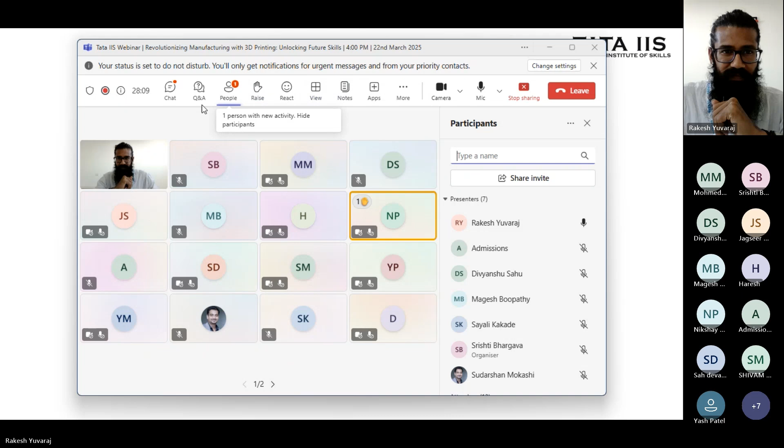Rakshesh Singh says yes. That is a very good answer. Thank you so much for replying to me.

Now we will see the slide. The answer is yes - technology webinar using 3D printing and additive manufacturing. Everything is possible by using 3D printing - everything in your day-to-day life, seeing things, feeling things. Many things are possible. So now I'm going to show you some slides of industrial applications and which sites are using it.

End of this slide. Again I will ask you the same question - is it possible or not? You give me your answer.

Before going into 3D printing, I want to clear something up: what is 3D printing and why 3D printing? In 3D printing, you can save nearly 90 percent of the material. We have traditional manufacturing, which is a very old technology. In that technology, you need to cut all your material and then scoop it out, like scooping ice cream. So you remove material and then you work with it - not exactly waste, but the material goes to scrap. You can reuse it, but 90 percent of the material needs to be removed.

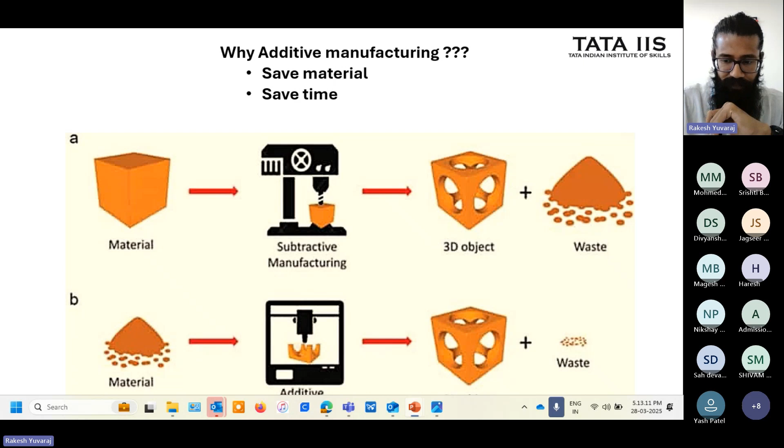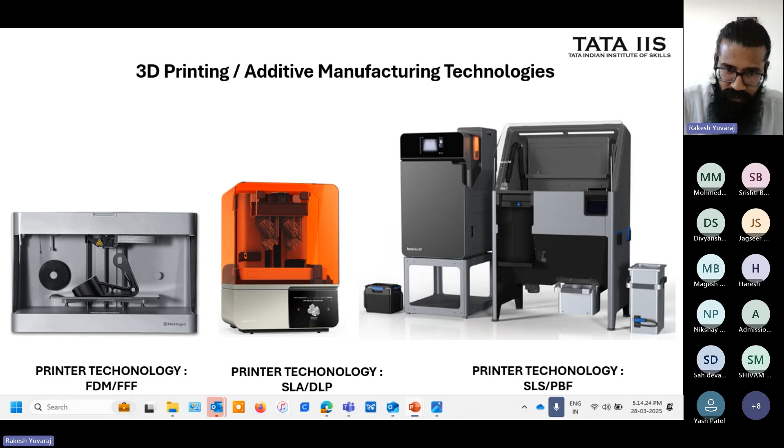The second printer, the orange colored one, is used mostly in the jewelry and dental industry. This is the third printer - we call it SLS, selective laser sintering. This third printer is a very industrial printer, and you can create any product for direct end use. These are the three common technologies used throughout the entire world - very, very popular. Same technology everywhere.

First, the FDM printer - it is solid based, meaning we use a material like a wire, which melts and then prints. The orange color printer, the second one, works with a liquid system - liquid meaning resin, which is the material used to print. The third technology, this big machine, uses a powder-based system. So these are all three technologies using three different materials: solid, liquid, and powder.

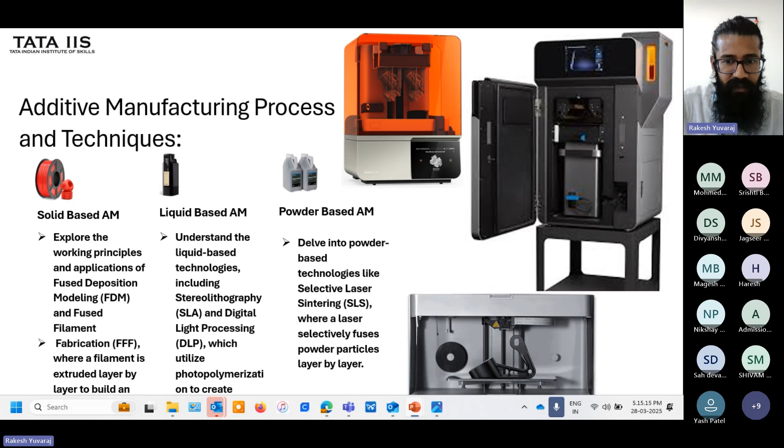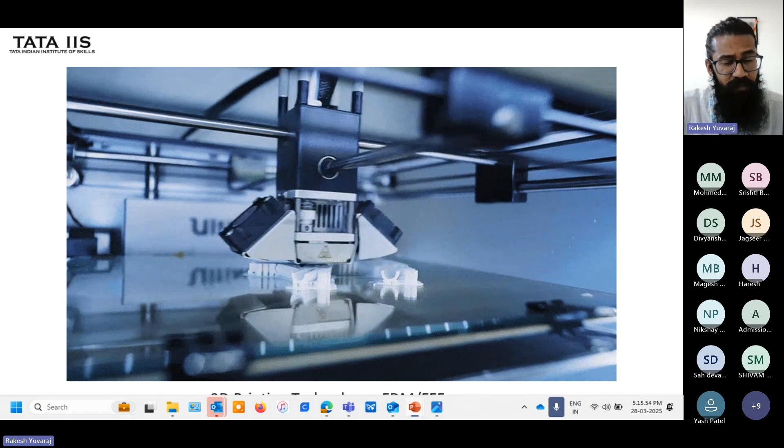This is your first technology of 3D printing. We call it FDM. This is the most affordable price, and for all the prototype work, we can use it. So this is the machine printing a part. This is how this machine works, very fast and also very user friendly. Many people see this thing in your school, college, or friend's office, or in movie. This is a more popular machine.

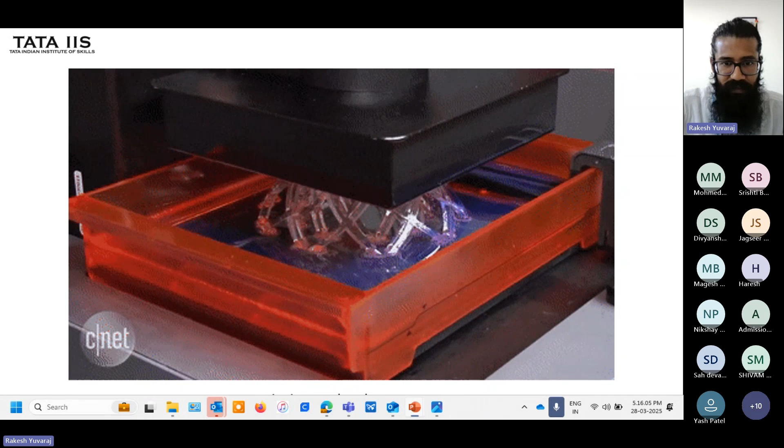And second printer, we call it SLA. This printer is used mostly in jewelry and dental. So at the bottom you're seeing here, the light and then the blue color liquid. This is a resin.

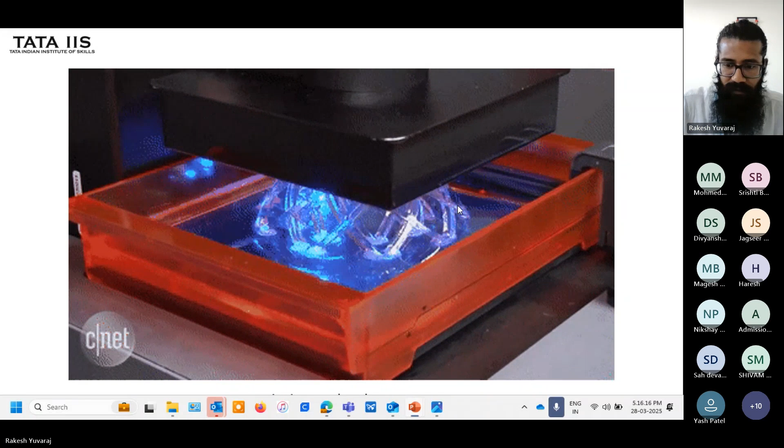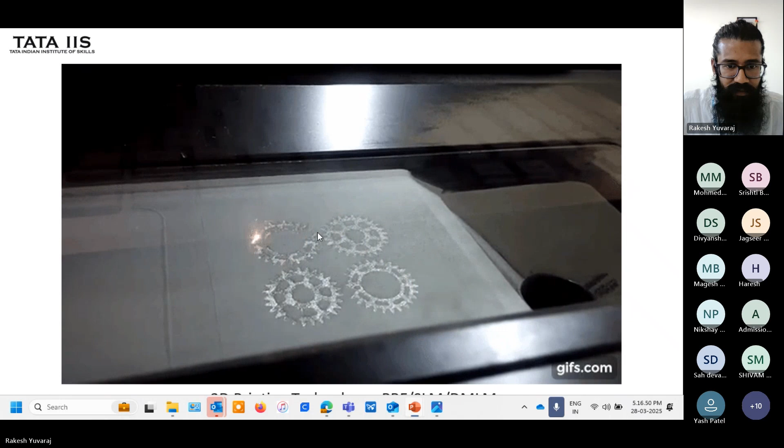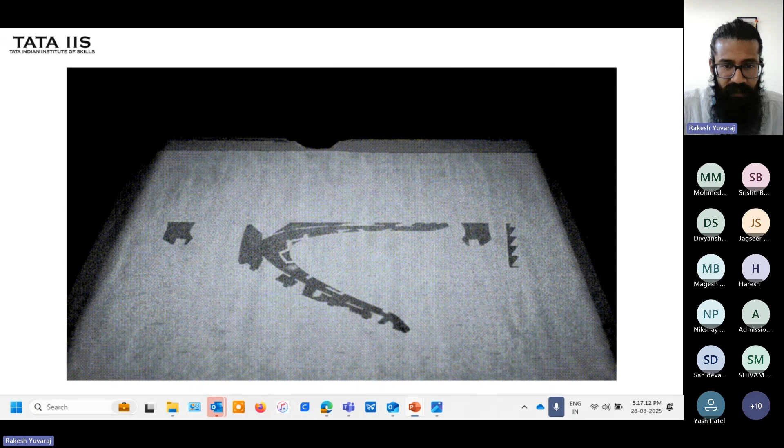This is your fourth technology. This is also most popular in industry. We use polymer powder here. Polymer powder is like a plastic thing, but not exactly plastic. In 3D printing, mostly 90% we will use only biodegradable powders and also very environment friendly powder. We will avoid 90% plastic in the 3D printing industry to save nature and the environment.

Now, first we will see what industries are very famous. We have nearly 7 to 8 industries very popular for using 3D printing.

First industry is biomedical. So here you are seeing a skull implant. It is very rare to manufacture and very complicated to manufacture. By using welding or other traditional manufacturing, it is not possible. If you keep it inside your head, it will start infection and sepsis. So we have to use a proper material. It needs to be a material your body will accept. We call it biocompatible material, that is titanium. We are using titanium material here, the world's strongest material also.

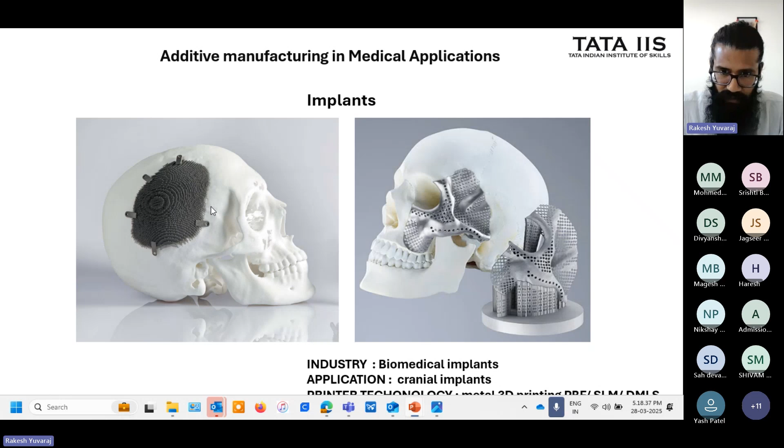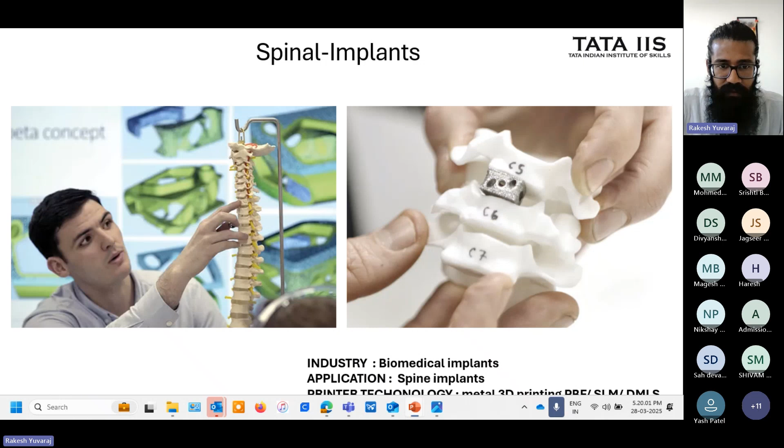Third industry in biomedical is spine implants. This implant is very critical because it goes and touches the patient's spinal cord. Once we damage the nerve system in the spine, the patient will be paralyzed, they can't move below the waist, they can't shake their legs or anything. It will permanently become numb. So 3D printing is the only technology that can give you the complex and complicated biomedical implant.

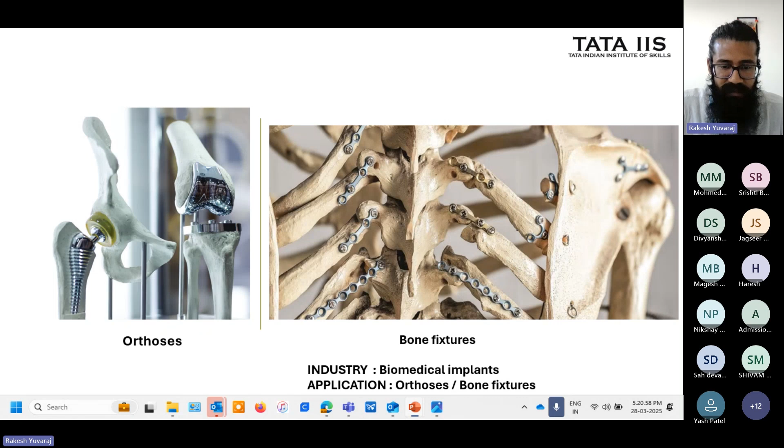Fourth biomedical implant is your joint, orthosis. You know that after getting old, 50 or 70 years old, or athletics, cricket players, their knee joint or hip joint will get damaged. So in 3D printing we have a solution. We can print that exact patient model file and print it for different patients having different body structure and bone structure. In 3D printing, you can get 99.9 percent exactly the same design and print it. This is the benefit of 3D printing in biomedical implants.

This is also 3D printing, a very future thing. For example, tissue bioprinting. There are lots of fire accident people, acid victims, who once they got in that accident, permanently their tissue gets damaged and they can't recover. But by using 3D printing, we can take DNA from the patient and a blood sample from the patient, and in the lab we will cultivate the tissue, cell cultivating for 21 days, and then print the machine with the exact tissue material.

So this is also based on a liquid system 3D printer. This technology already exists in the United Kingdom. In a university, they have the machine, so they can research. In future, up to 10 to 12 years, we can print kidney, we can print internal parts, we can print many things for a human body. Right now research and development is going on, but this is the future.

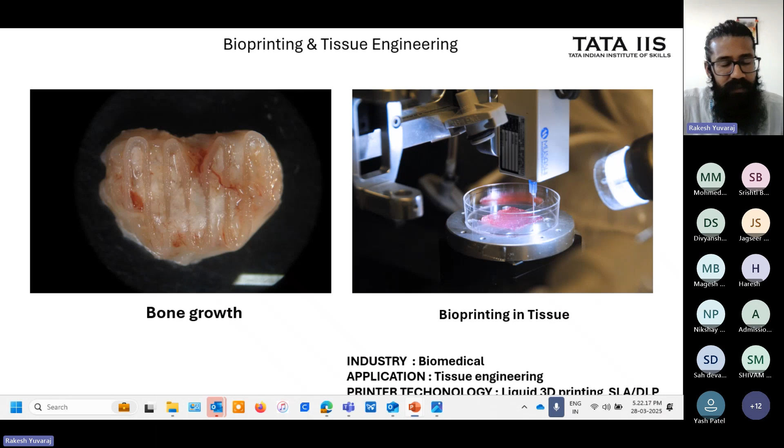This is the process for people who have lost their hand, fingers, or legs — they are able to use prosthetics made by 3D printing. In normal manufacturing processes, the weight is heavier, so patients can't lift the object properly because the piece itself is heavy. But in 3D printing, you can print it with less weight and high strength.

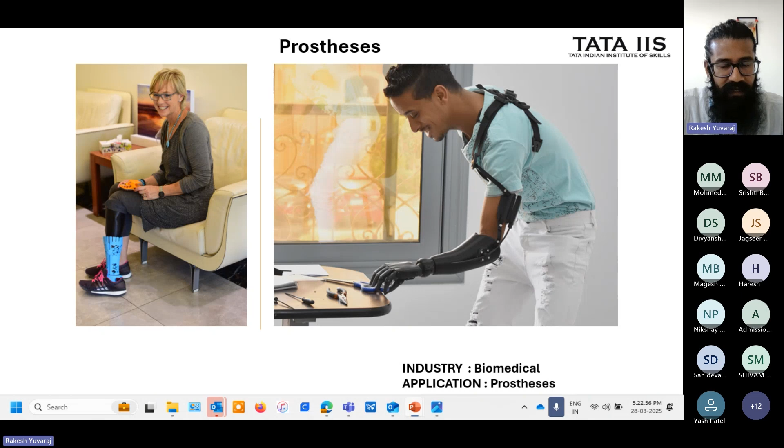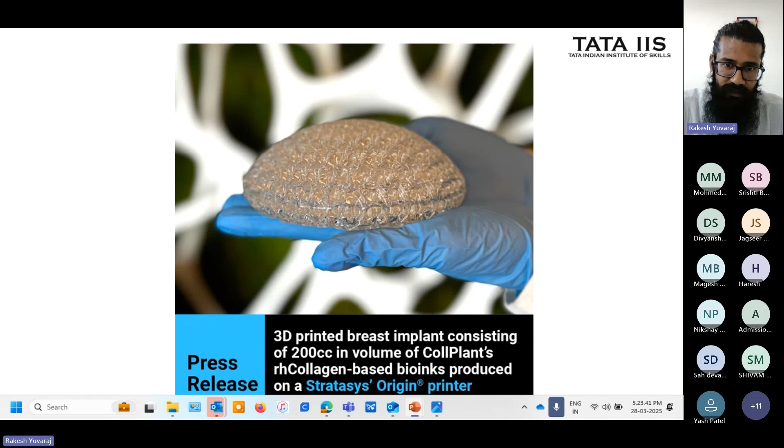So the first industry we saw was biomedical. Now the second industry is food. Yes, we can use food science, food nutrition, and everything. In medical science, food is also very important for nutrition — without proper nutrition you can't get the proper protein for your body. So this is a very good technology for the food industry.

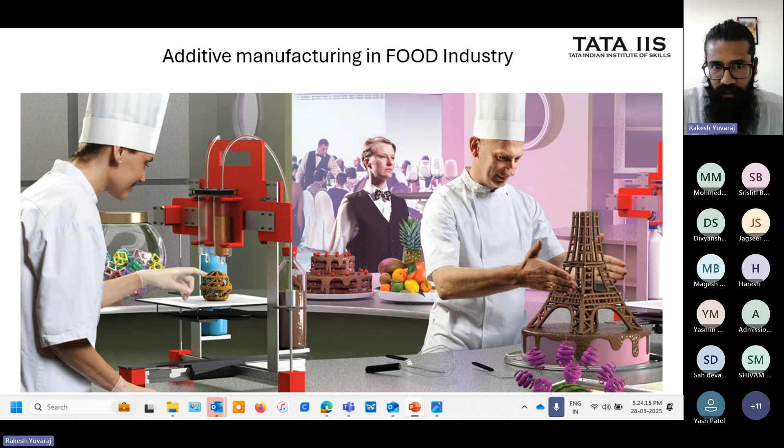Here you are seeing the machine. It is printing a piece of biscuit, and this is chocolate, and this is also chocolate.

I'll give you one example. Abroad, in the US, Canada, Germany, on top of wedding cakes they have a bride and groom doll — exactly the same doll. They can scan and print the model. By using this machine, they can create a statue that is exactly your same image.

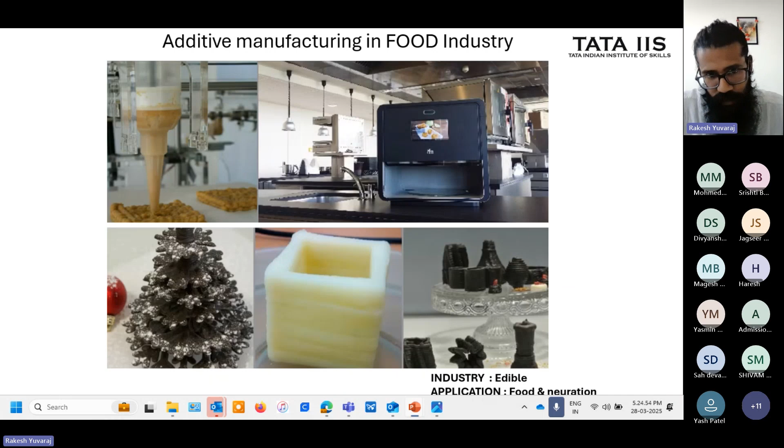Third industry is architecture. Yes, in 3D printing you can create beautiful living spaces. Some of you in this group already read the news about 3D printed living spaces in India.

In Bangalore, we have a 3D printed post office. In Chennai, we have a 3D printed home, given by the Indian Army and also the aerospace industry. Both of these provide living space for their workers. Now they have created around 30 houses as a sample, and families have started moving in there.

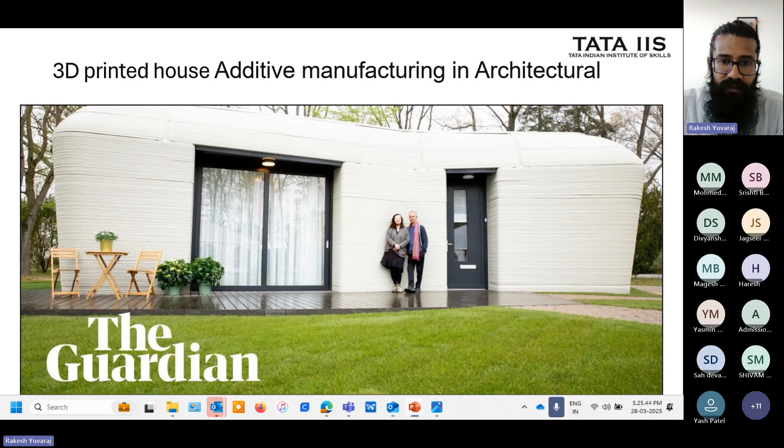Here are some examples in different places and countries that have been 3D printed. This one was printed in Germany, and this one in Canada. These two are nearly printed. And this last image is printed with a traditional African theme and culture. So these houses already exist.

These are not simple renderings — these are all very original images, and people are actually living inside the houses. Some people are using them as offices, some as commercial places. So these already exist — 100% original and 100% 3D printed.

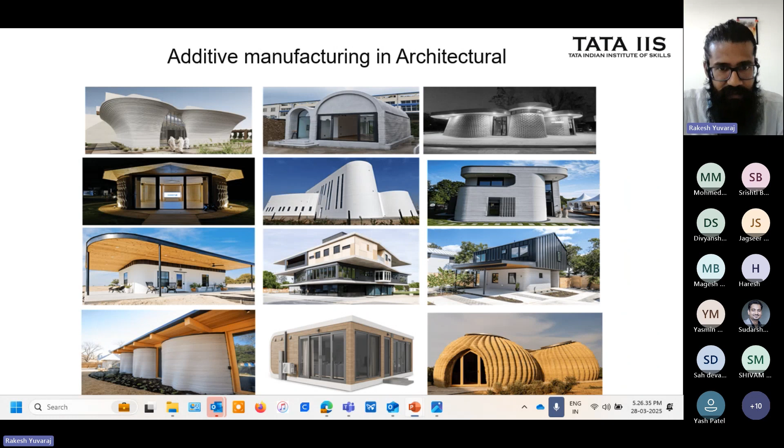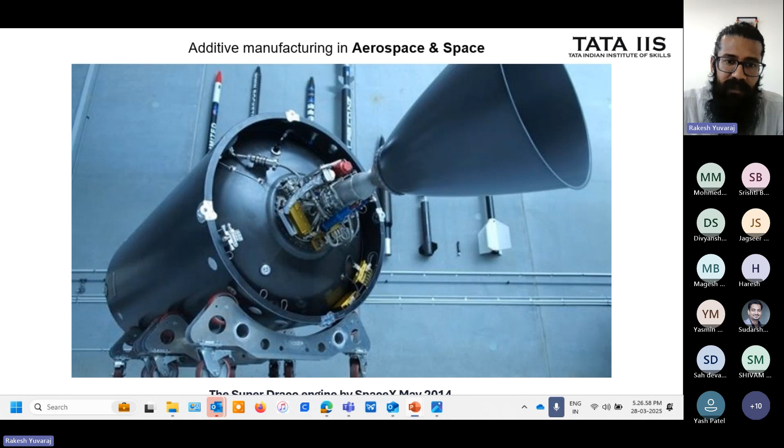Now we come to another industry: 3D printing in aerospace. In aerospace, we all know Tesla, we all know Elon Musk. In the SpaceX project, as early as 2014, they started using 3D printing for rocket thrusters and boosters.

There is another company called Relativity. This company created a rocket using 85 percent 3D printed weight in the product inside the rocket — 85 percent completely 3D printed — and it was successfully launched and reached the orbit station.

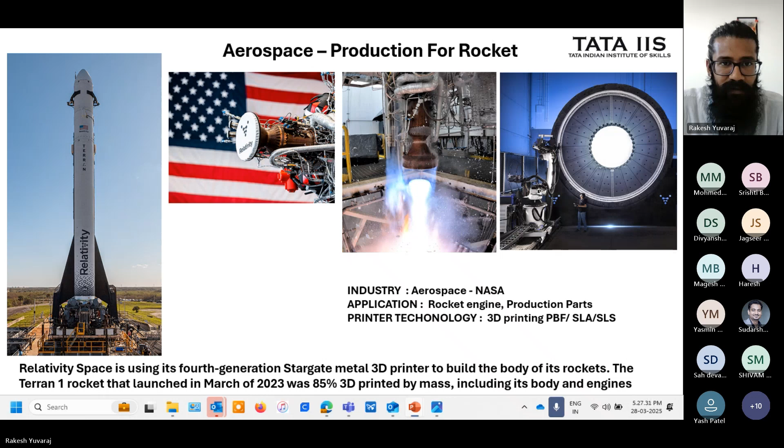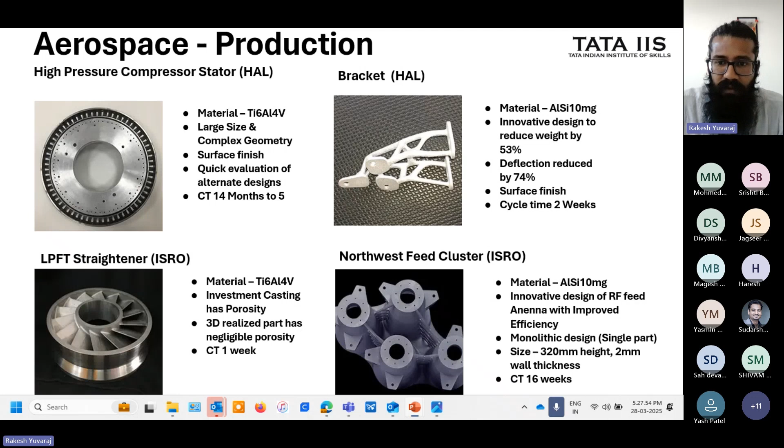Some aerospace products are critical to manufacture using welding or other traditional manufacturing methods we have. These are all very complicated to manufacture, but with 3D printing you can achieve all those complicated parts for aerospace.

3D printing is mostly used in aerospace for rovers and satellites, because rovers and satellites need very less weight and more strength — due to gravitational force, we need less weight while controlling impact, pressure, and temperature very well. By using 3D printing, you can use different materials and achieve both strength and lightweight, so it can survive out in space.

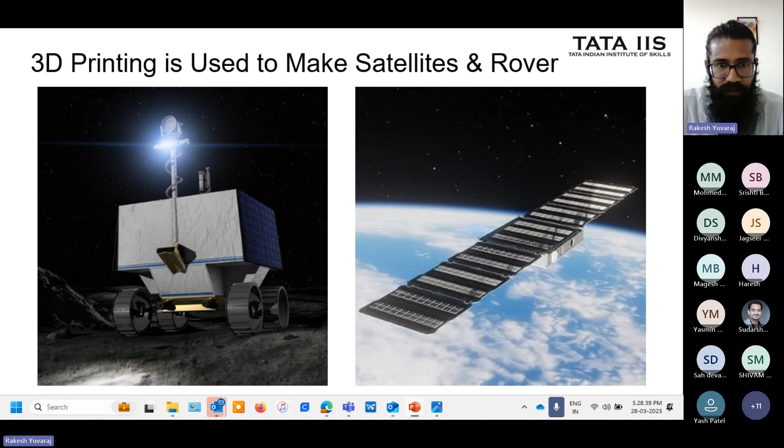It is very surprising to hear NASA is already planning construction on the Moon and Mars. We haven't started the project yet, but here on Earth, in a NASA laboratory in the US, they created a machine and showed a demo. In the near future, building good houses and places on Moon and Mars is 100% possible. It will take around 15 to 20 years, but we've already started working on it.

To build this house, we don't need many humans. We need a few robots, a 3D printing machine, and one or two humans for guidance. We don't even have to go to space. By simply guiding them here in real time, we can print it. The project is already started, testing is going on, and soon we will get good news about it.

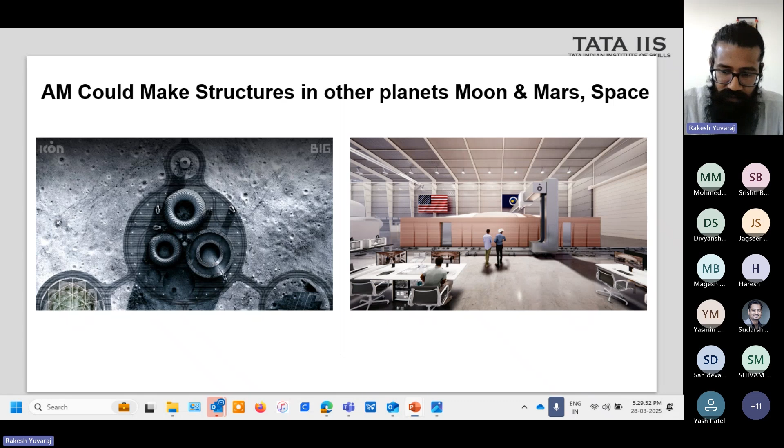3D printing in space. Just imagine you are in space, and any of your parts is missing or damaged, or there's a critical situation. You can't wait in space to get the part from another spaceship, because it's very expensive to send parts to the space station. But if you have a 3D printing machine, you can print your own parts very easily.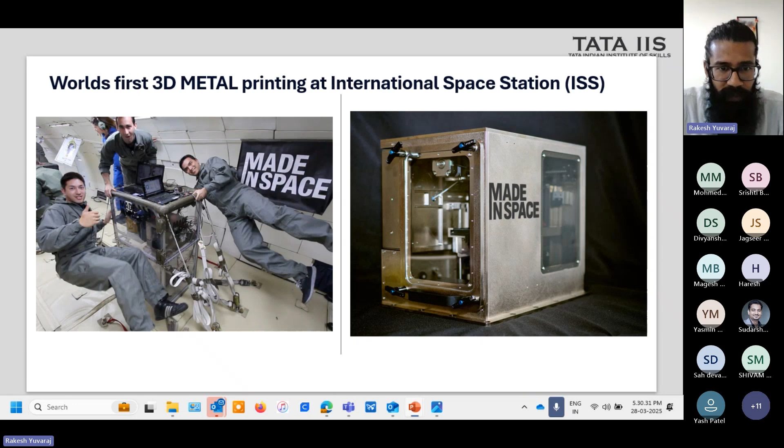But the problem is the gravitational force. Due to gravity, you can't easily print it. But in 3D printing, we have also solved this issue, and now we have the 3D printer that works in space.

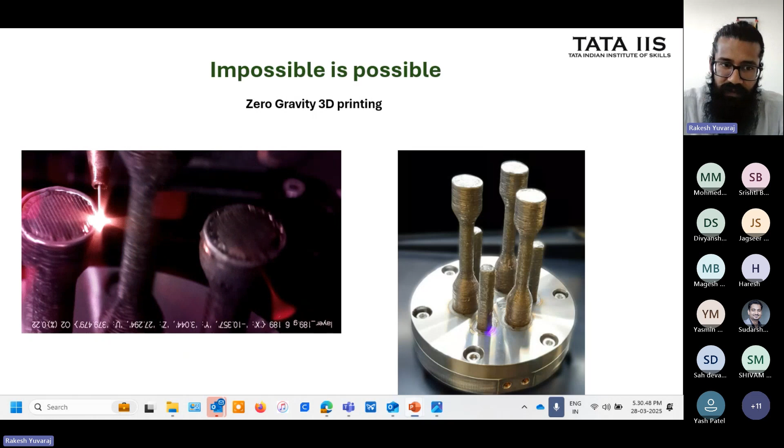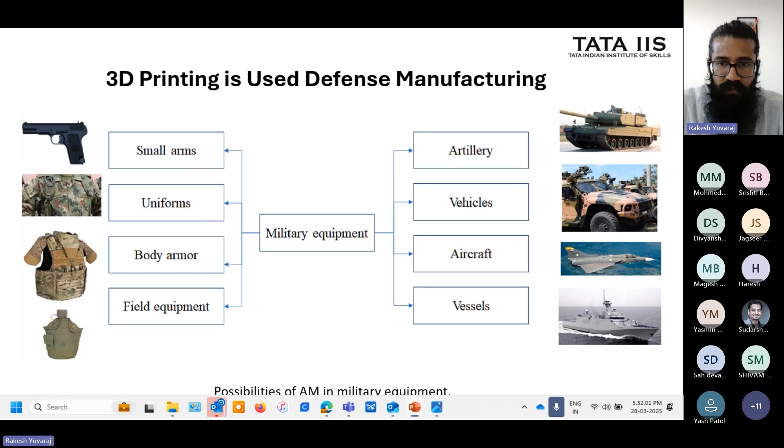Artillery means your tank. And vehicles, aircraft, jets, and everything. And vessels means your strike ships. All these things can be made using 3D printing.

Ex-One Military Pod is one company that already made this innovation. They are turning a trailer into a 3D printing lab. We all see small trucks used as restaurants, taking small containers and trailers and using them as cafe shops.

But in the army, at the border, they changed a trailer into a 3D printing laboratory, putting the 3D printing machine inside. If you are at the border and any part is broken or missing, you don't have to wait for the war to end. You can print your own things, survive in the war, and save others in the war.

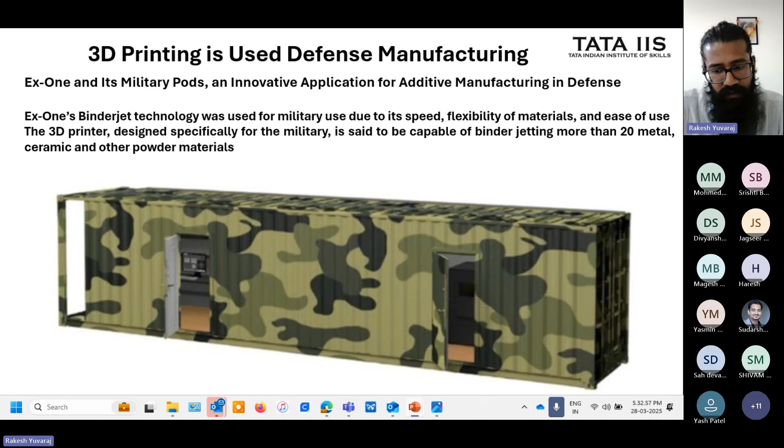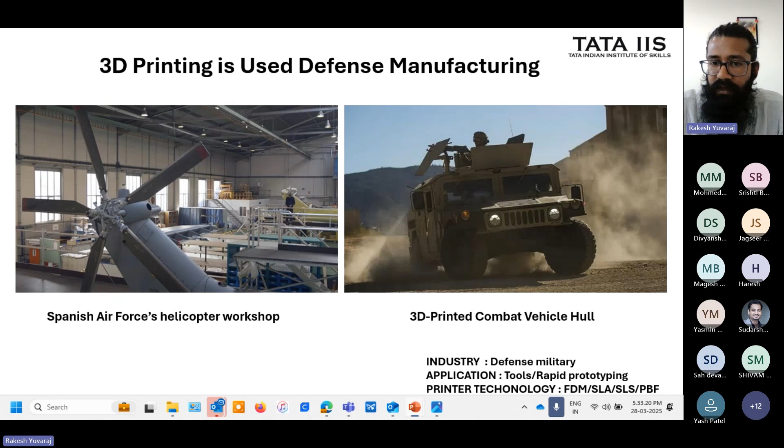Spain's Air Force has also started using 3D printed parts in their helicopters, and some rugged Hummer and Hulk kind of vehicles have started using 3D printing for combat vehicles. It gives you a bulletproof kind of capability. So they are using it.

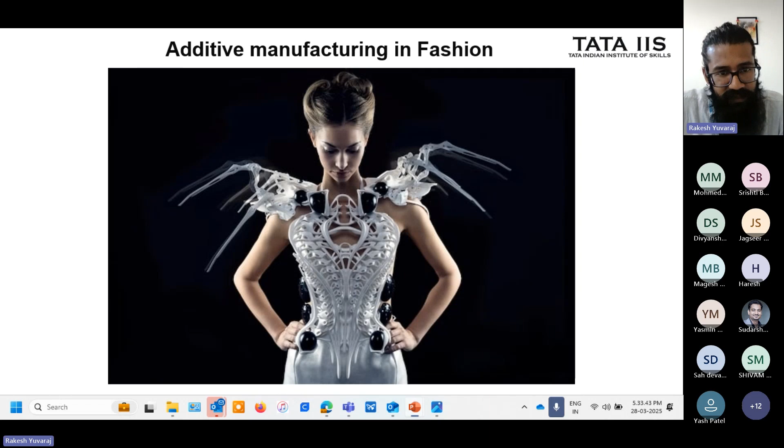Another industry - 3D printing in fashion. Yes, we can 3D print a dress. We can 3D print trousers, pants, jeans, and everything. This already exists. This is a real one.

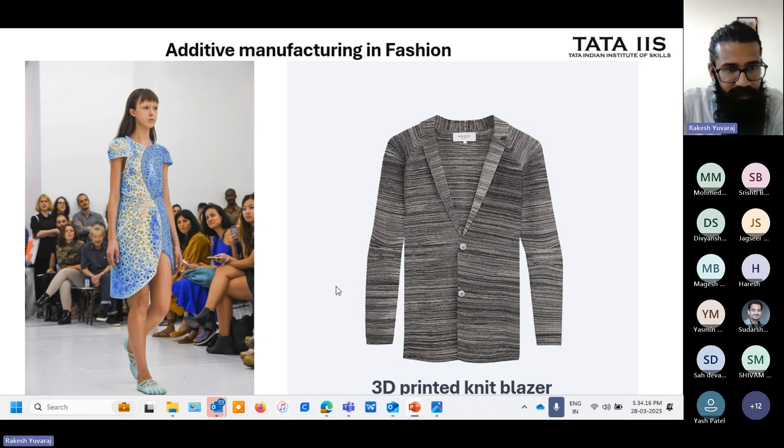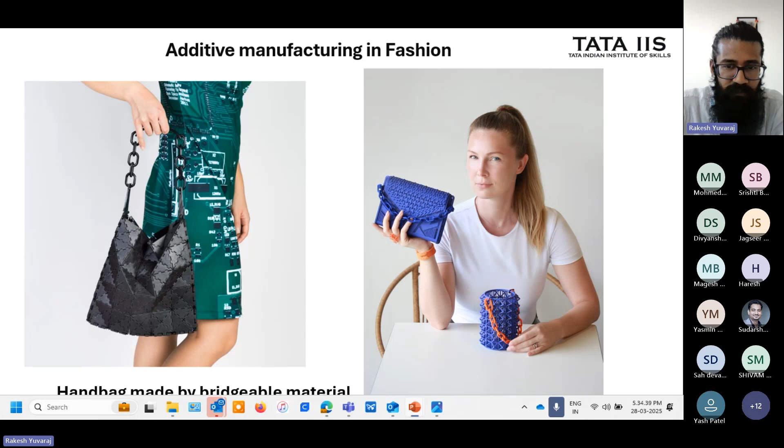In the fashion industry, it's now mostly used by the handbag industry. They are creating 3D printed handbags - you can create foldable and flexible handbags. You can change your daily design, change your daily shape too. Not just one shape or one design for the whole year - you can change it and reshape it.

Another industry in fashion is footwear. Adidas and Nike have already started using 3D printed shoes. What is the benefit of 3D printed shoes? It gives you very lightweight and very flexible material.

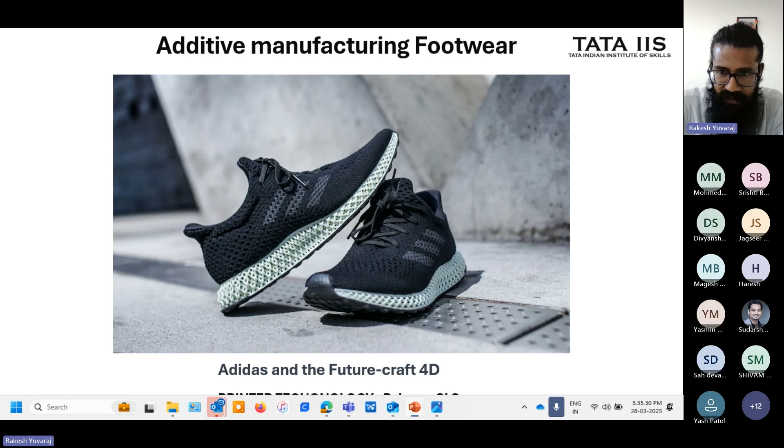For example, some athletes have an injury in their toe, so the toe shape is completely changed. By using 3D printing, we can exactly print your toe shape in any shape. This is very, very advanced for athletes - that's why Adidas and Nike started using 3D printing.

Another industry - it's a very famous industry and a very, very big investment industry. It's jewelry.

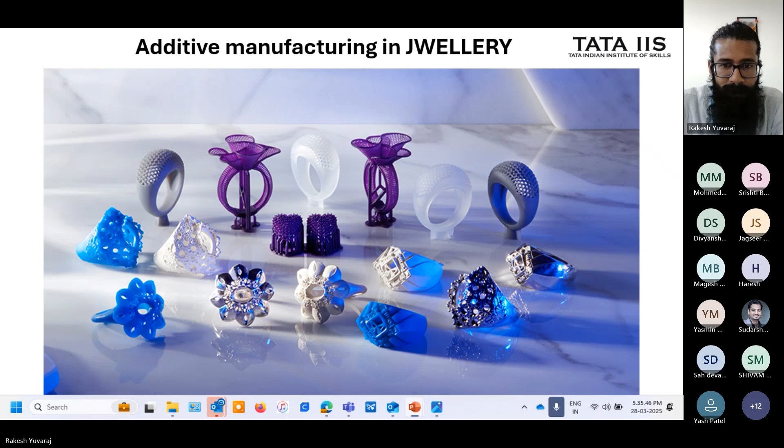These are some of the products printed by SLA, liquid technology 3D printing. We saw in the beginning slide one orange colored small machine - that machine printed this part. You will get very beautiful, good detail - even hair detail is possible, and many, many minute details in jewelry can be achieved.

And these are all things done by our batch students in Tata IIS. Students are very small people, like 16 to 18 years old. They created their own design and printed it. This is all actual jewelry - see how beautiful they have done this.

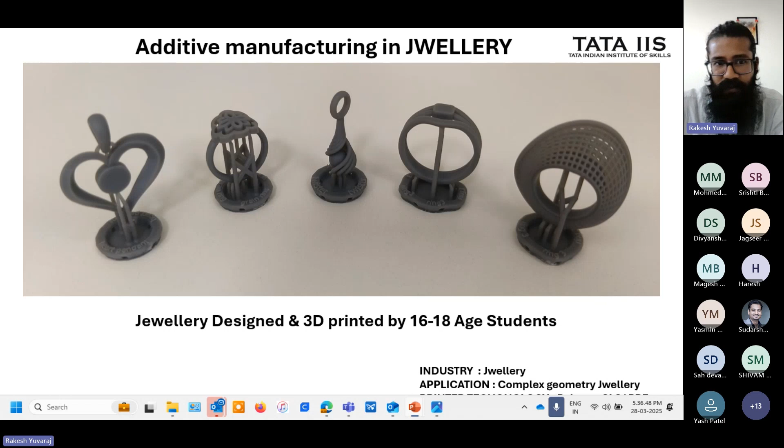Again, as an example, one of my students has created this movable jewelry with a complicated design. This is not easy to create and print, but everything is possible, and so they have done this.

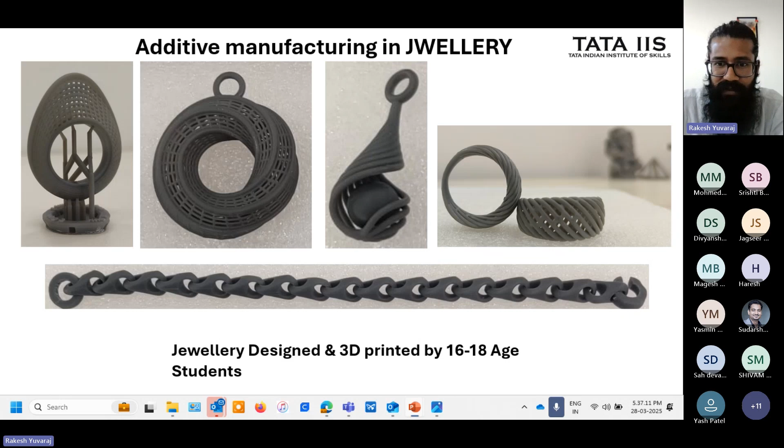Now we are going to see making the impossible thing possible in 3D printing. For example, imagine mixing two materials is easy, but having your top be a different material and bottom a different material - that is very, very difficult to manufacture. For example, if you have one rod, a pen, with the top full of gold and bottom full of silver - can you manufacture it? The answer is it's a very complicated and expensive project. But in 3D printing nowadays we can do it. Not only one material - you can use multiple materials and print it.

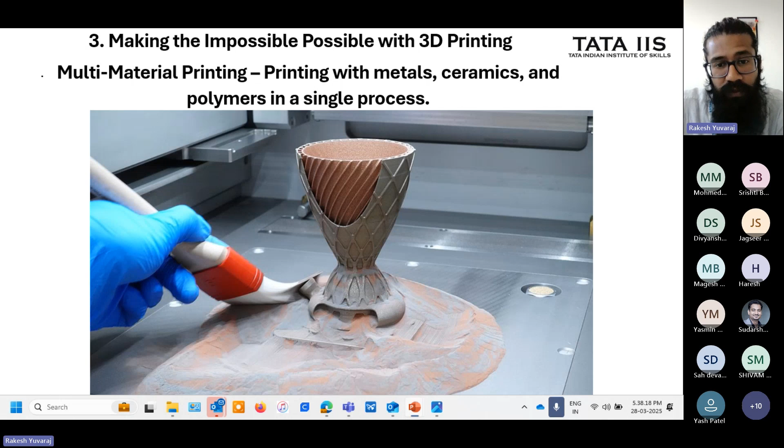Now we mostly use this in aerospace research, and this is very latest technology - in 2024 only it started growing and getting popular. See, this is all one material in the top, brown color, and here is copper for the channeling and cooling. How beautiful it is - this is very rare to manufacture with traditional manufacturing.

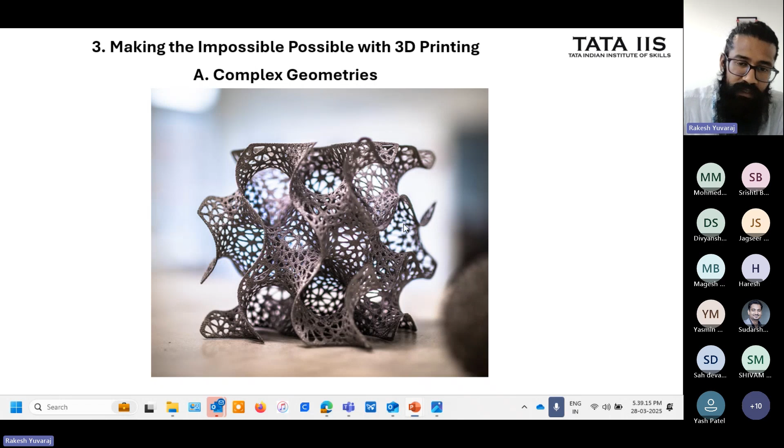Third thing, making the impossible possible with 3D printing. See how complicated this design is - 100% this is not possible by any traditional manufacturing. If you wanted to do it with any traditional manufacturing, old technology, this is not possible at all, you can't do it. But how is this created? Already this object is there - how? By using 3D printing.

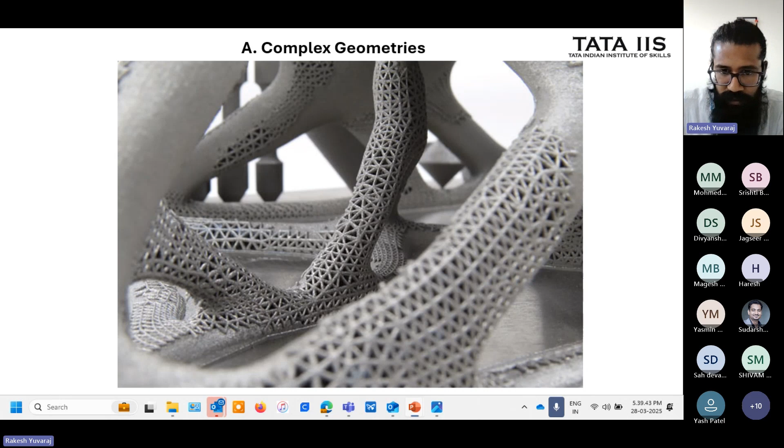See this complex design - this is all very critical to manufacture. I will say in another manufacturing method this is an impossible thing - you can only use small shapes and sizes. But in 3D printing, 100% you can print all your imagination, all your dreams, everything.

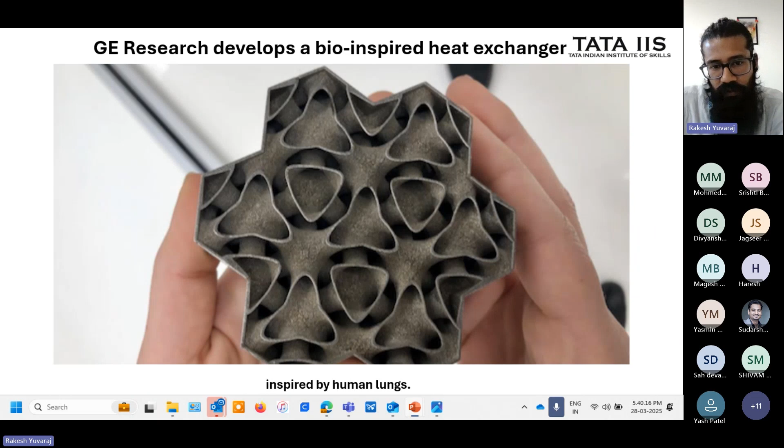This is one beautiful heat exchanger by General Electric, and they have designed the heat exchanger using the human lungs structure - yes, this is our human lungs inside structure, all the veins, all the walls go like that. So it will have more surface area, which will cool down your inside cooling channels very well.

Another important benefit in 3D printing is low volume and mass customization. For example, in traditional manufacturing you can only manufacture one size at one time - you can't manufacture 100 sizes in one time. That's impossible - you have to first manufacture size number one, remove it, then go manufacture size number two, size 80, size 90. But in 3D printing you can directly manufacture any size, any shape, any customization - you don't have to change anything, it will directly print. So this is very beneficial for medical implants, jewelry, automotive components.

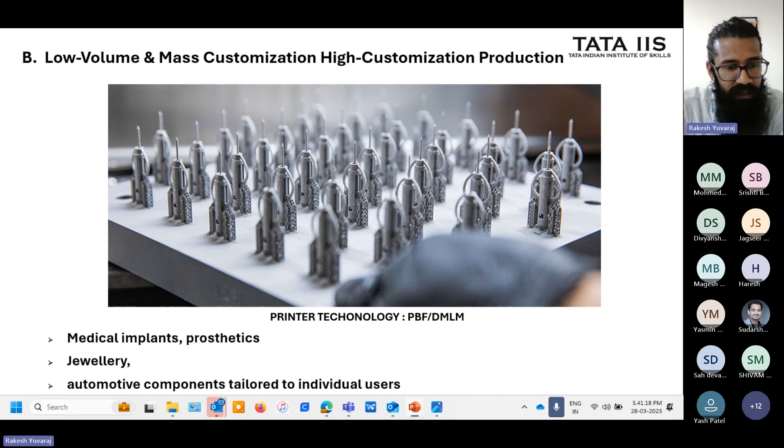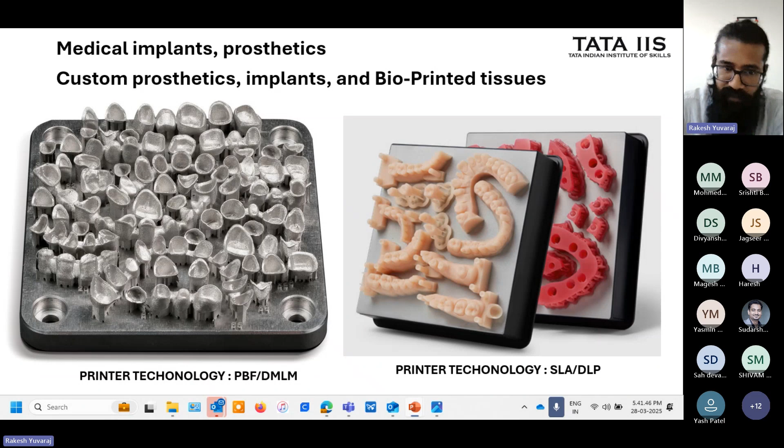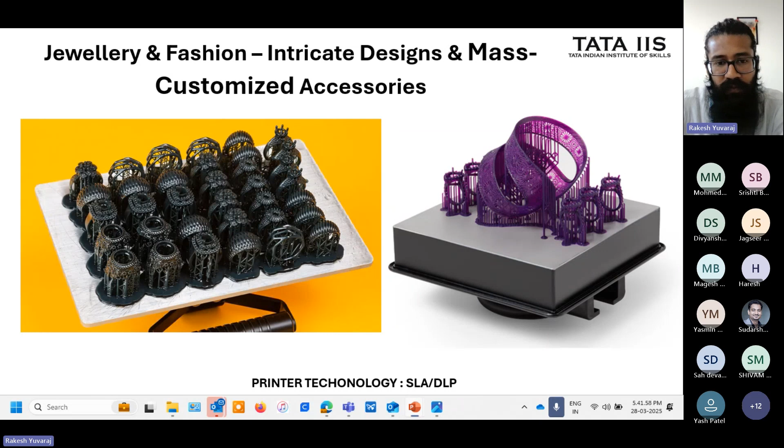Similarly, mass customization is very useful for the dental industry because all teeth are different, so they need to be printed in different sizes too. In traditional manufacturing you have to wait, change things, print, wait again, change and print - but here that's not necessary, you can directly print it. In jewelry, same customization - any ring size can be printed in one printing run.

Tool-free manufacturing. Some of you may not be aware of this. So what we are doing here is tool-free manufacturing. In traditional manufacturing, you have to buy a tool, change it, and wait for it. The tool investment is also higher because these tools easily get damaged, worn out, and scratched.

So you have to spend some percentage of the money for tools in manufacturing. But in 3D printing, there is nothing like that. Put your material inside, and directly your product will print. But traditional manufacturing is also very important in life. Without traditional manufacturing, 3D printing is also not possible. Both are combined together. The benefit is you can 3D print without tools, but traditional manufacturing support is also important for 3D printing.

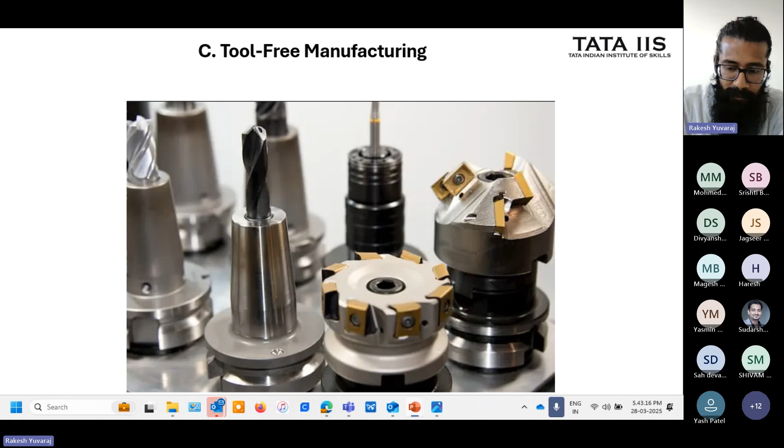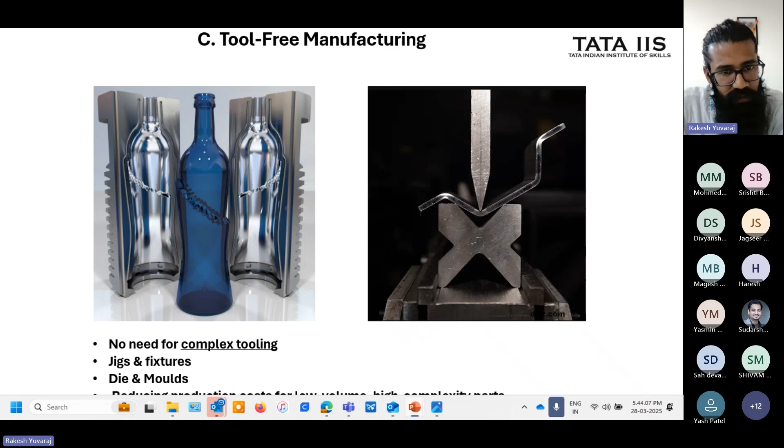This is hybrid manufacturing. Also, I told you in the last slide, we can't eliminate traditional manufacturing because after 3D printing, for the smooth surface and very beautiful finished surface, we want to use traditional manufacturing for polishing or for the final surface finish.

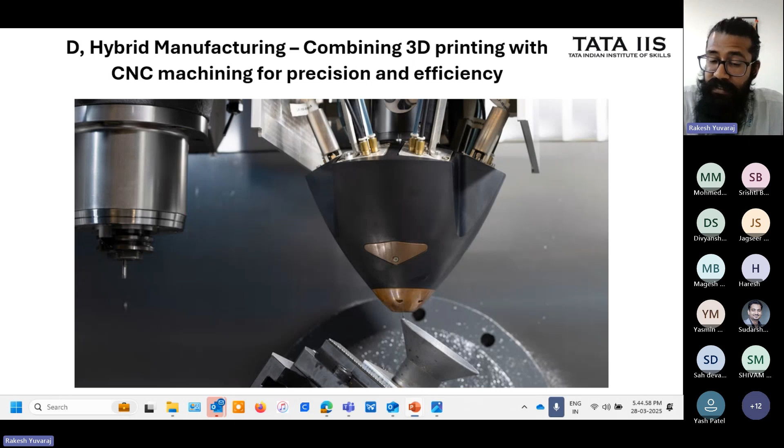So this is a hybrid machine, 3D printing and CNC machine, both in the same machine. In one word, very advanced technology and very safe old technology, both combining in the same place. Advanced new technology and safe old technology - both combining together.

So this is how your part will print in 3D printing. And after, see your surface is full of lines and scratches. So we have to turn on the CNC machine in the same machine, and it will remove everything and you will get a smooth surface.

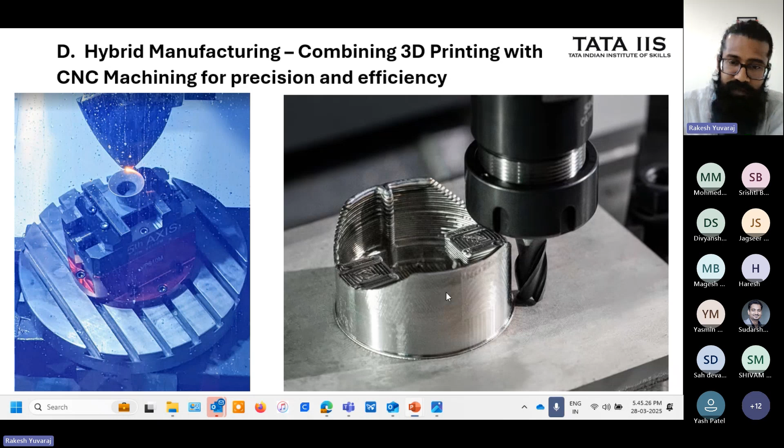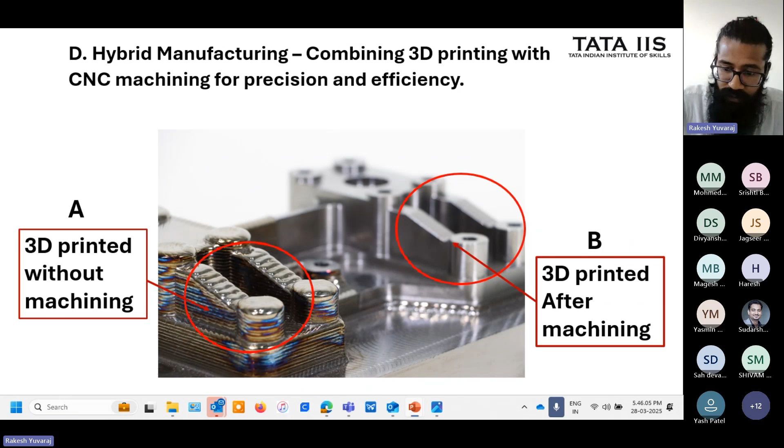Sustainability and waste reduction. In 3D printing, you can save 90% of the material. I told you, for a 500-gram product, you will waste only nearly 50 grams of material. And recycling - what is recycling? You can recycle your old material and reuse it. Not directly - we have a process, and after that we can 3D print it.

Eco-friendly material. Yes, in 3D printing we have varieties of eco material, also biodegradable and biocompatible, and many more, as I told you. In 3D printing, the benefit is we are completely avoiding plastics. Completely. So this is the benefit of eco-friendly material.

Natural composites. In 3D printing, we have some materials using wood dust, sand grains, and paper kind of material. We are using it as a base material, mixing it, and creating a new material. This is possible. Also, 3D printing will save lots of energy consumption - not 100 percent, but at least you can save around 40 percent compared to traditional manufacturing.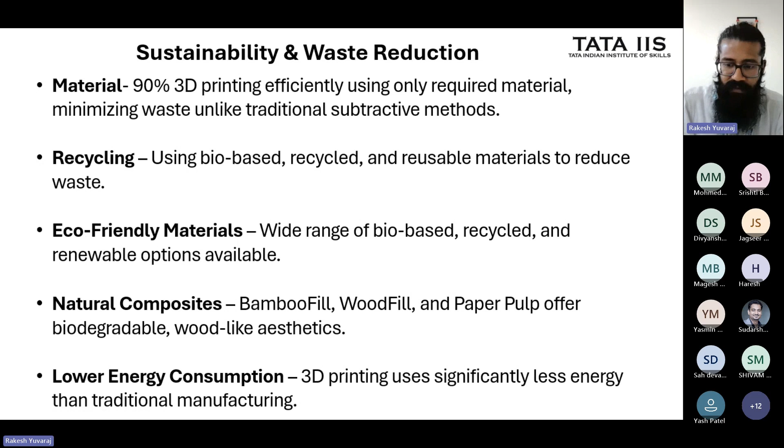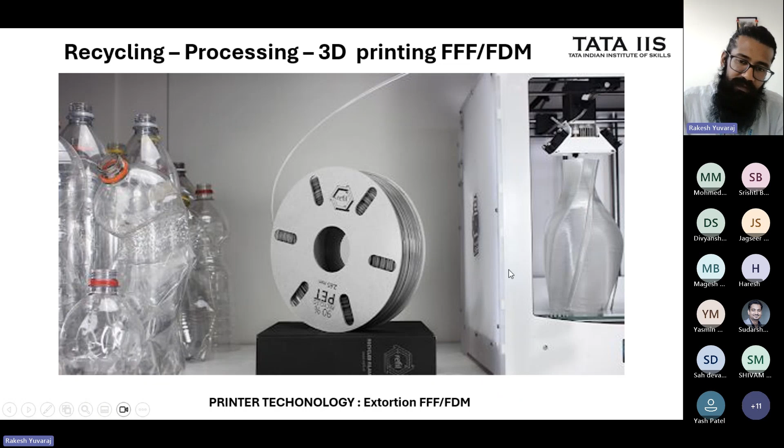This technology is mostly possible in FFF and FDM. The basic 3D printer is very easily available and affordable - everywhere we can see it. This is your product - collect the waste product and cut it, and after that recycle, then print and use it.

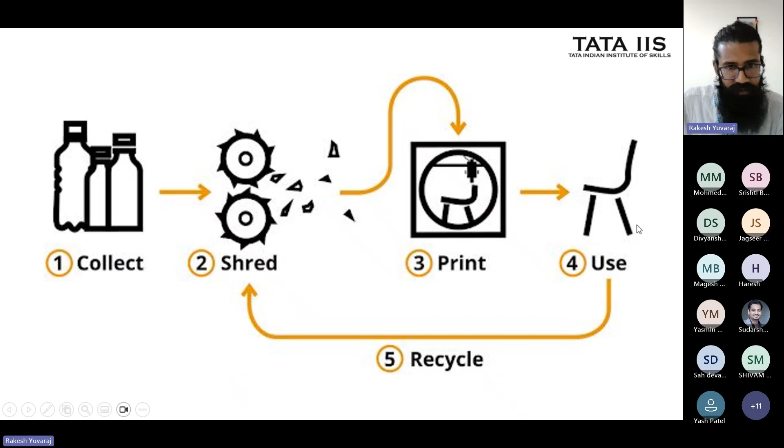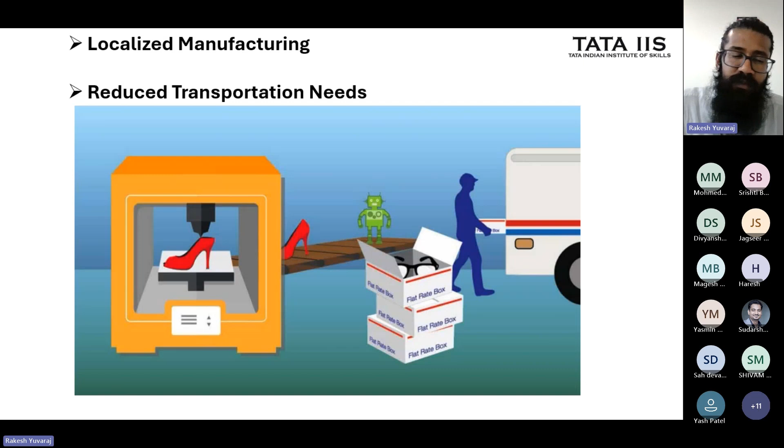Localized manufacturing reduces transportation needs. For example, in 3D printing, you don't want to do most of the assembly. In traditional manufacturing, if you want to print 4 or 5 parts, you need to attach, weld, and screw them together before it becomes a final product. But in 3D printing, you can attach all the different components and print it as one component. So you don't have to send your material to another state, district, or area to process it. You can save fuel consumption and reduce carbon for the environment.

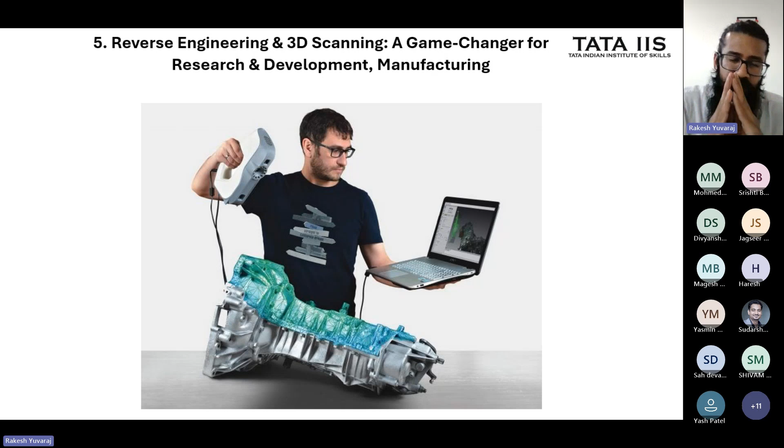The fifth industry is reverse engineering and research and development. Here, what we are doing is we can scan any part. For example, if you don't have time to sit and design, or don't know how to create that object properly, or can't get the detail properly, we have a machine called a 3D scanner. That machine will scan and give you about 100 pieces of meshes into one small object. Then you can redesign and print it.

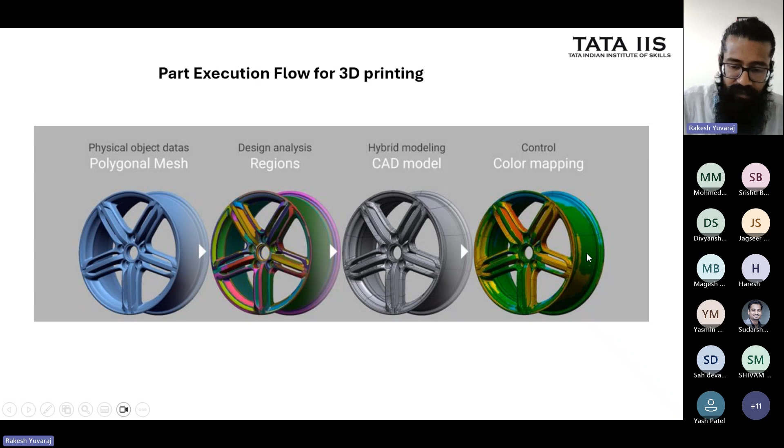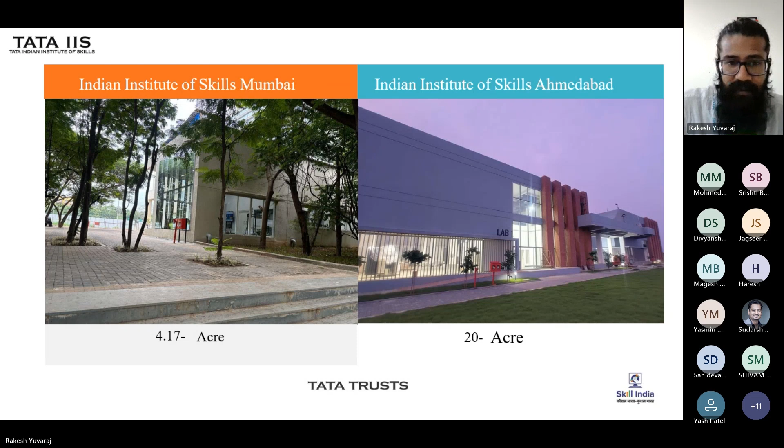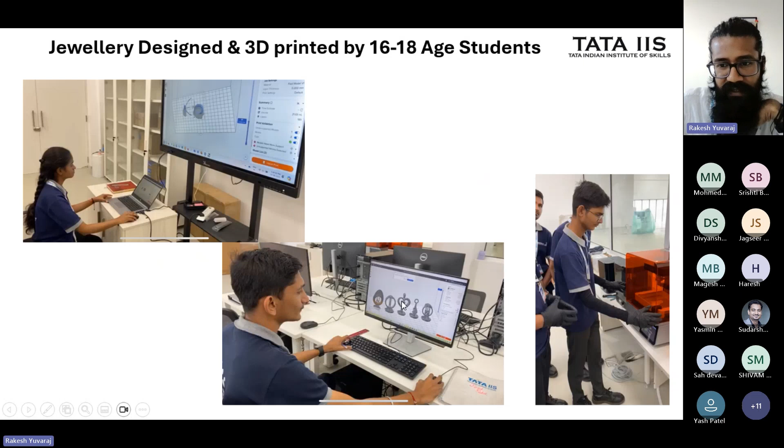Now we will come to an important and very good future subject: 3D printing companies and manufacturing. After we learn 3D printing, what we are going to do, of course, is want to go for the job and get more knowledge. So what are all the companies internationally and what are all the companies in India?

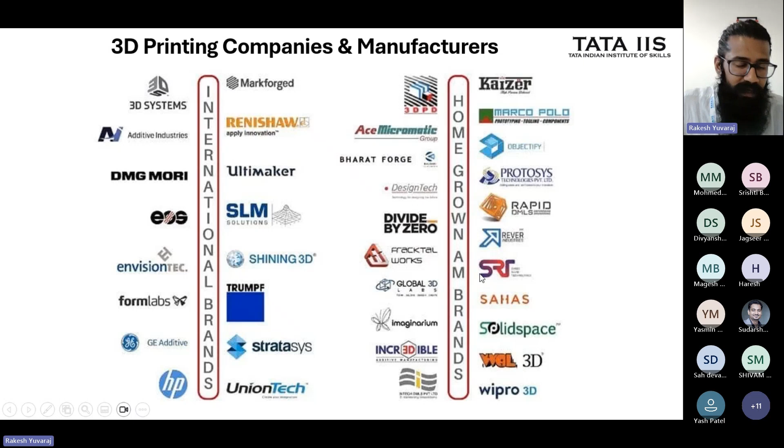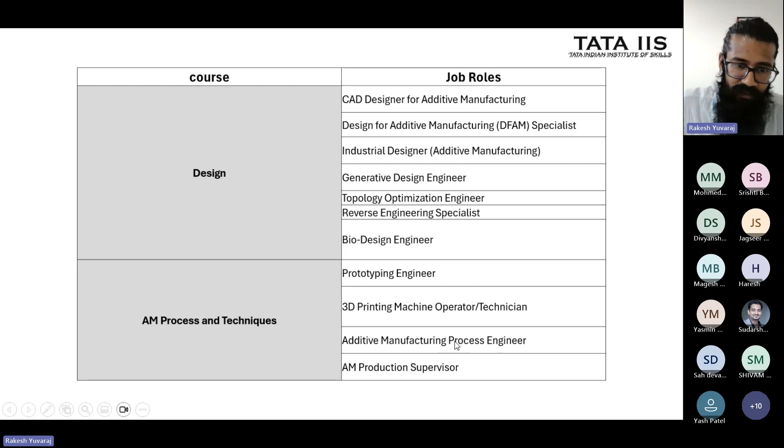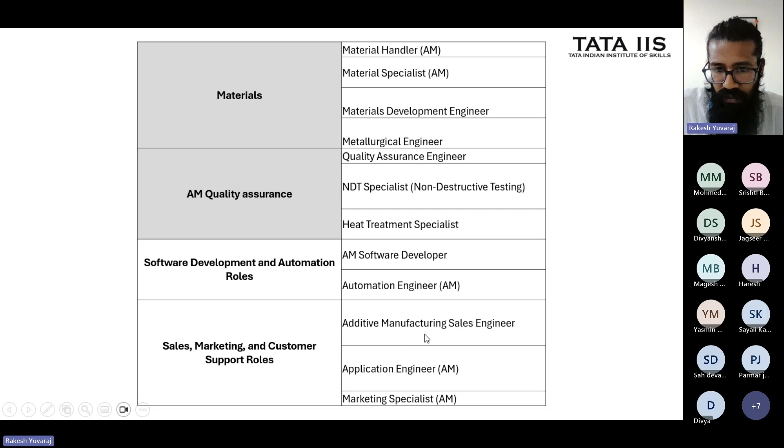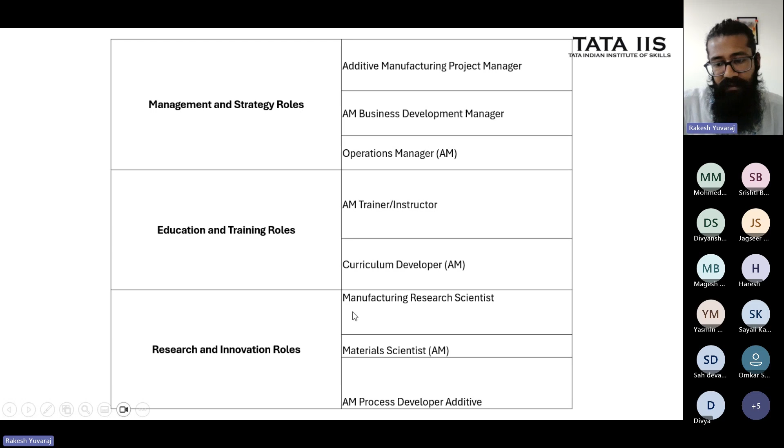And here we are finishing the slide. Thank you so much for hearing and listening peacefully.